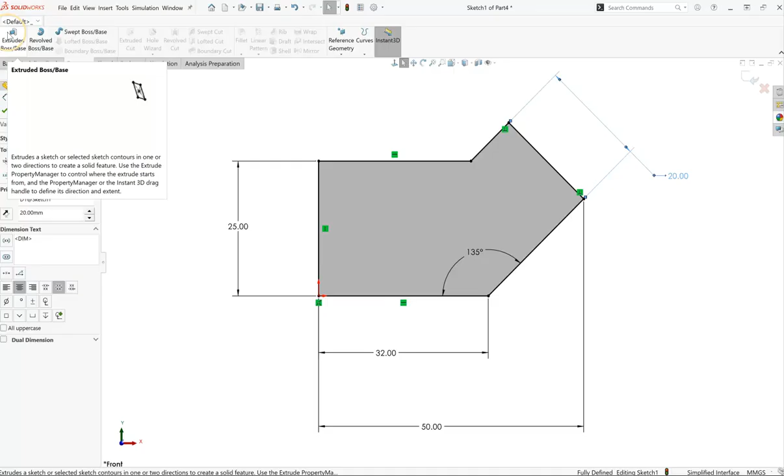It says I can revolve this. For sweeping, I would need another path, and we don't have that. So really what we want to do is this extrude boss or base.

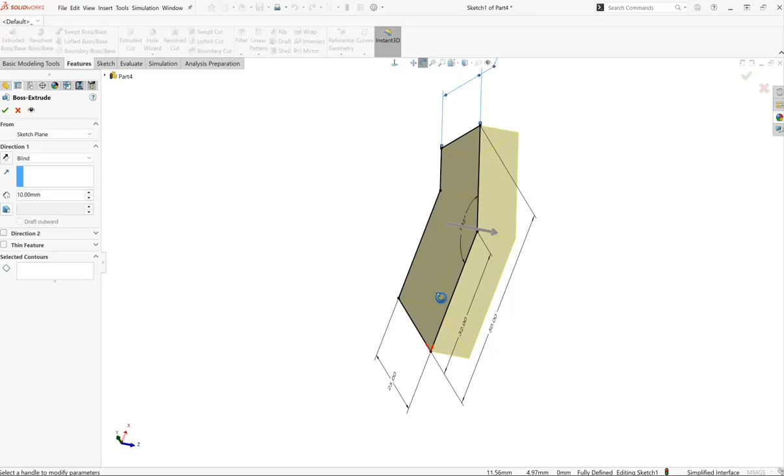I click on that, and it immediately tries to give us an idea of what that shape is going to look like. I can move it around, holding my mouse button down. I also have this handle here where if I click and hold it, I can drag it out to the side and kind of get an idea of what that length is going to be.

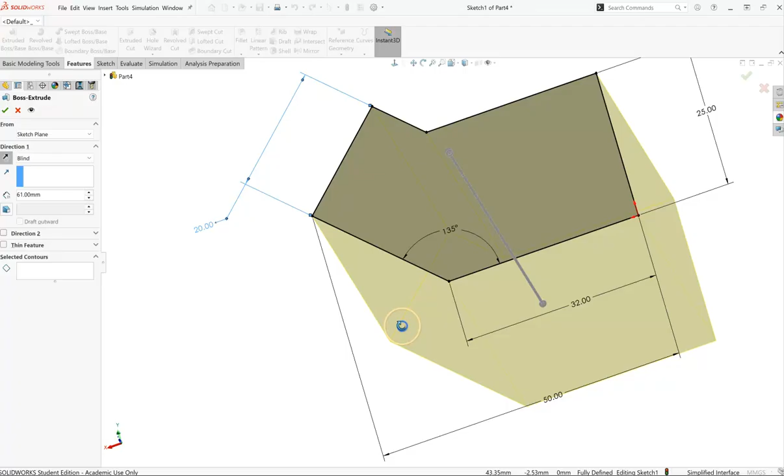I've got this thing turned around here, and sometimes it's hard to get it back where you want. That's where we use the heads up toolbar - if I click on view orientation and click front, it goes right back to how we created it. Now I can put it a little off and get the whole model.

Over here I've got some options, and this is how we're going to extrude it. I can do blind, which is a specific width in one direction. I can go up to a vertex or a surface, which means if I have another surface, it'll take it up to that and merge with it.

I can do offset from, say, a previous surface we'd created up to a body, or I can do mid-plane, which means it's going to extrude from our sketch equally in two directions, both ways.

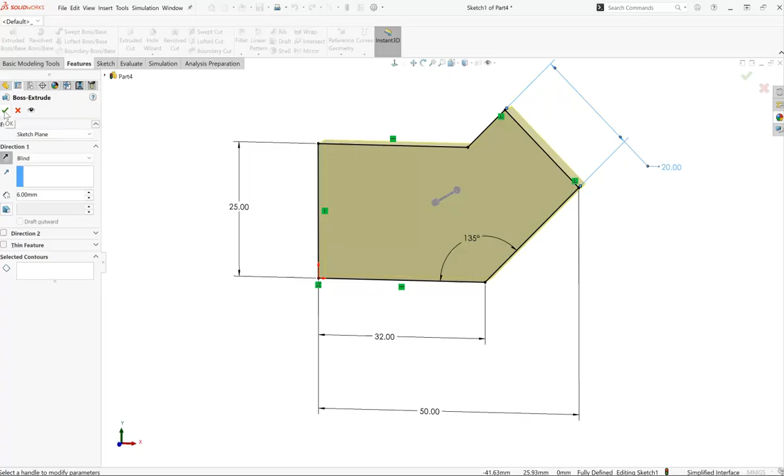This one we're just going to do blind, and we want 6 millimeters. Type in 6, hit OK. You get an idea what it's going to look like. And when I hit the green check mark to accept it, there is our first part.

So we've now created our first solid model. If I hold my center mouse button or wheel down, I can turn this and look at it in any direction. That's really one of the wonders of SolidWorks - once I've created something, I can look at it from any direction I want, and it really makes the manufacturing process go a lot better.

So you can save this, save it somewhere you can find it. One suggestion is on your computer create folders for each week, and save your drawings or sketches in each folder, which makes it really easy to find.

You can do whatever you want, but then you're going to hand this in, or submit this file to the place that I showed you early on in these video series. So congratulations, you got your first drawing done.

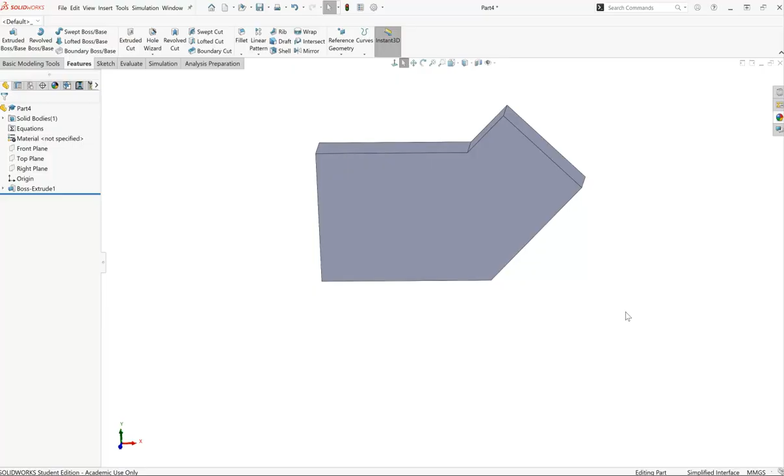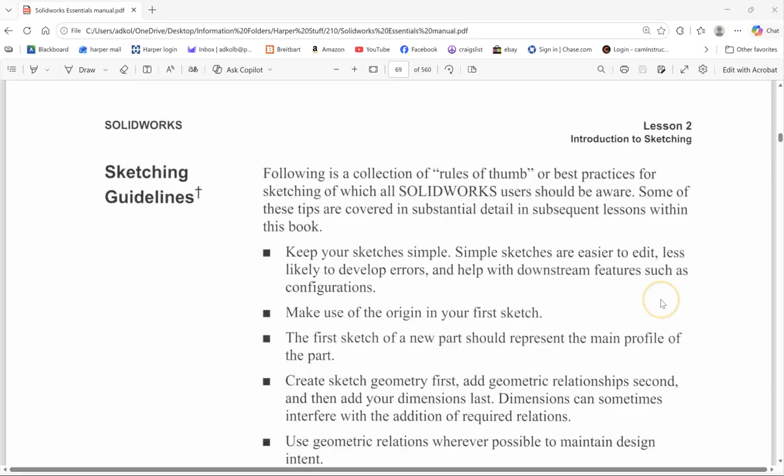Before I end the video, I want to draw your attention to page 55 in the book. Go over this and be familiar with it - it's a really good, simple list of things to keep in mind while creating sketches and the design intent. It's a short list, but the items are important and can make your sketches go a lot better.

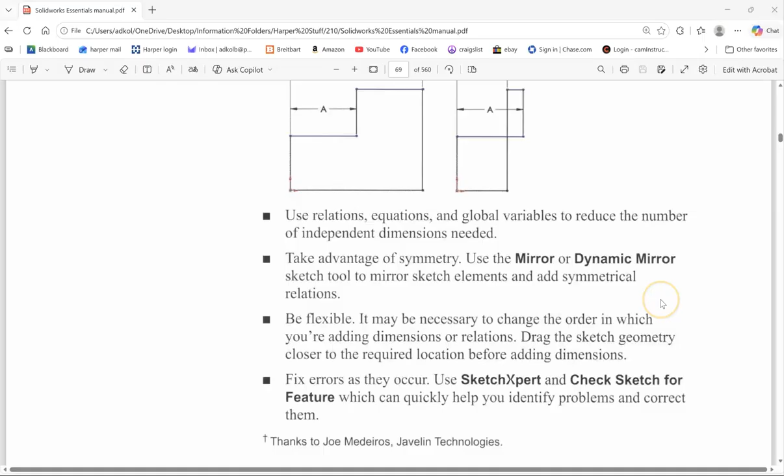So just wanted to draw your attention to that, and we will pick this up with the next lesson.